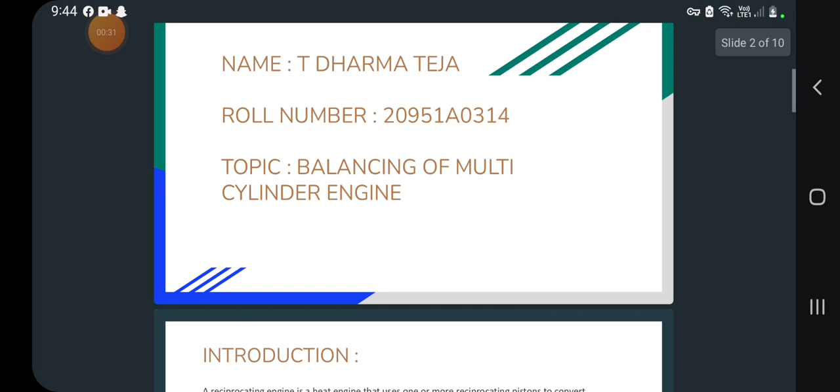Introduction. A reciprocating engine is a heat engine that uses one or more reciprocating pistons to convert the pressure into rotating motion. They are used extensively in motor vehicles, power generators and aircraft. The engines using more than one cylinder are multi-cylinder engines, which are used extensively nowadays.

These engines can be inline or radial. Inline engines are usually found in 4 and 6 cylinder configurations, with all cylinders aligned in one row with no offset. They have been used in automobiles, locomotives and aircraft, although the term inline has a broader meaning when applied to aircraft engines.

An inline engine is considerably easier to build than an otherwise equivalent horizontally opposed or V engine, because both a cylinder bank and a crankshaft can be milled from a single metal casting, and it requires fewer cylinder heads and camshafts.

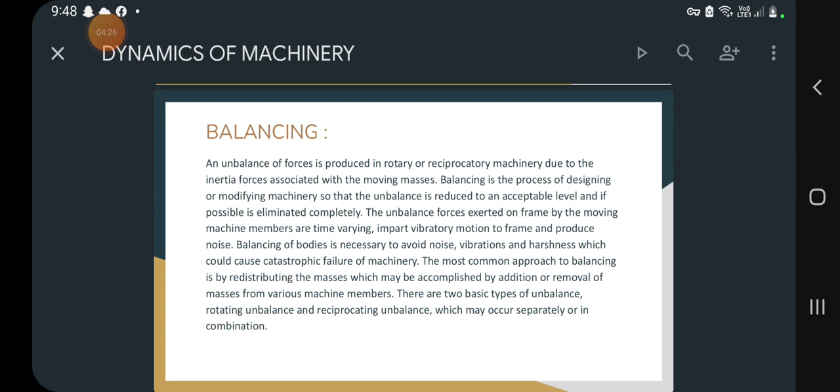Balancing of rotating masses: static balancing and dynamic balancing. A system of rotating masses is said to be in static balance if the combined mass center of the system lies on the axis of rotation; this is called static balancing.

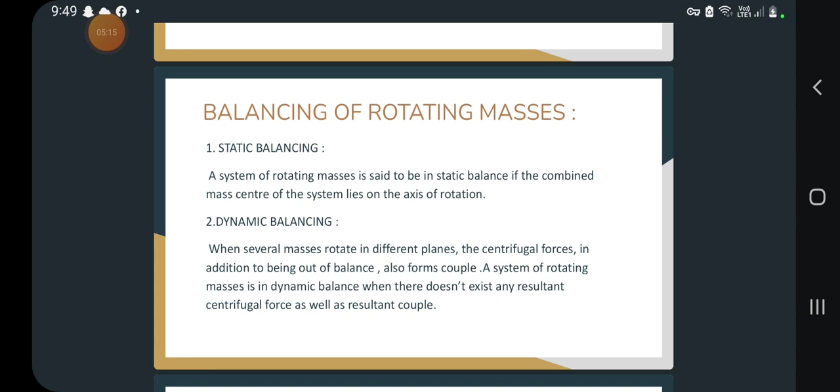And dynamic balancing: when several masses rotate in different planes, the centrifugal forces, in addition to being out of balance, also form a couple. A system of rotating masses is in dynamic balance when there does not exist any resultant centrifugal force as well as a resultant couple; this is called dynamic balancing.

Primary and secondary balance. Primary balance is the balance attained by accommodating for the eccentricities of the rotating masses, including the connecting rods. Primary balance is controlled by adding or removing masses to or from the crankshaft at each end at the required radius and angle, which varies due to both the design and manufacturing tolerance. Theoretically any conventional engine can be balanced perfectly for primary balance.

Secondary balance is attained by compensating partially or fully for kinetic energy of the pistons, non-sinusoidal motions of the pistons, motion of the connecting rods, and sideways motion of the balance shaft weights. The second of these is the main consideration of the secondary balance.

There are two main control mechanisms of secondary balance: matching the phasing of pistons along the crank so that their second order contributions cancel, and use of balance shafts which run at twice engine speed and so can provide a balancing force.

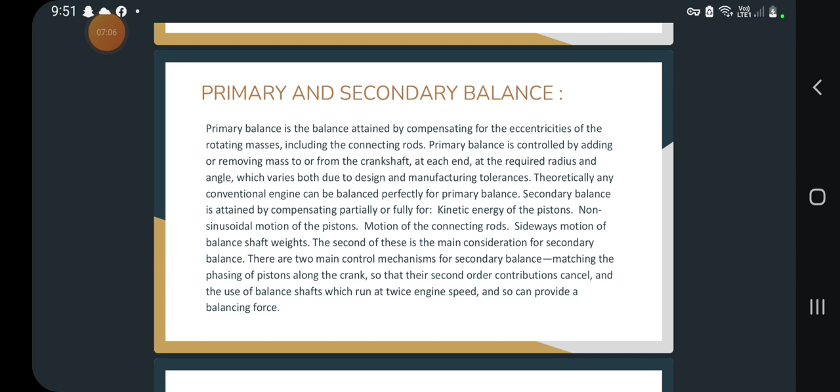Now, theoretical analysis of balancing multi-cylinder inline engines. Multi-cylinder inline engines are used in applications where high power is required, and they give an advantage of better balance of forces and moments. They also provide a better and even distribution of torque output to the crankshaft, and facilitate smooth running of the engine. The general configurations used are two-cylinder, three-cylinder, four-cylinder, five-cylinder, six-cylinder and eight-cylinder inline engines.

The six-cylinder and above configuration engines are completely balanced for forces and couples. The forces and couples for different cylinder numbers and firing orders are analyzed below theoretically.

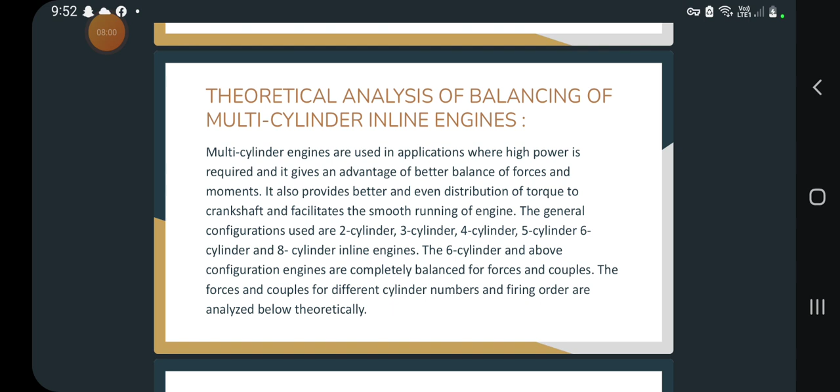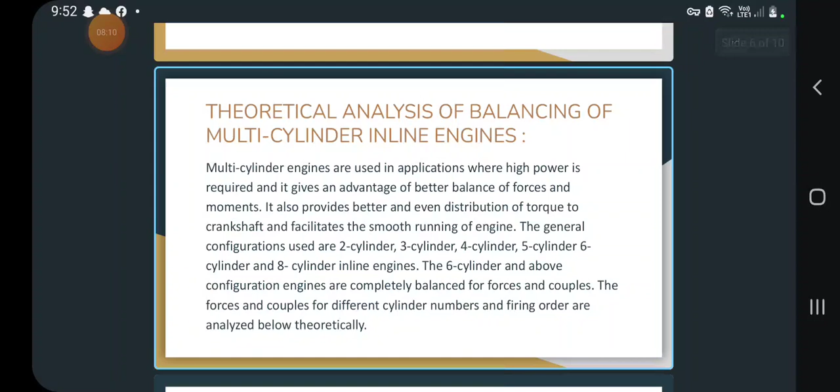Theoretical analysis of balancing of multi-cylinder V engines. A V engine is a common configuration for an internal combustion engine. The axial planes in which the two sets of pistons reciprocate intersect at the crankshaft axis and form a V angle, beta. In automotive installations, V6 and V8 engines are common, with beta either 60 degrees or 90 degrees. The 90 degree V angle is the most preferred and generally used. Therefore, we have used beta equals 90 degrees in this analysis.

The V configuration generally reduces the overall engine length, height and weight compared to the equivalent inline configuration. The general configurations used are V2, V4, V6, V8, V10 and V12. The forces and couples for different cylinder numbers and firing orders are analyzed below theoretically.

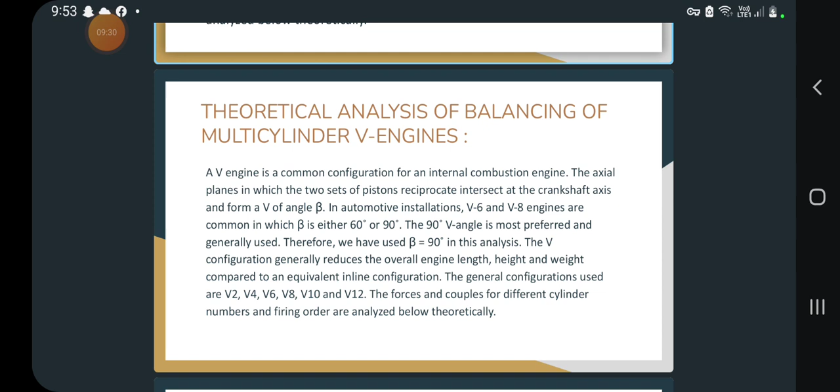Balancing of single cylinder engine. A single cylinder engine produces three main vibrations. In describing them, we will assume that the cylinder is vertical. Firstly, in an engine with no balancing counterweights, there would be an enormous vibration produced by the change in momentum of the piston, gudgeon pin, connecting rod and crankshaft

once every revolution. Nearly all single cylinder crankshafts incorporate balancing weights to reduce this. While these weights can balance the crankshaft completely, they cannot completely balance the motion of the piston, for two reasons.